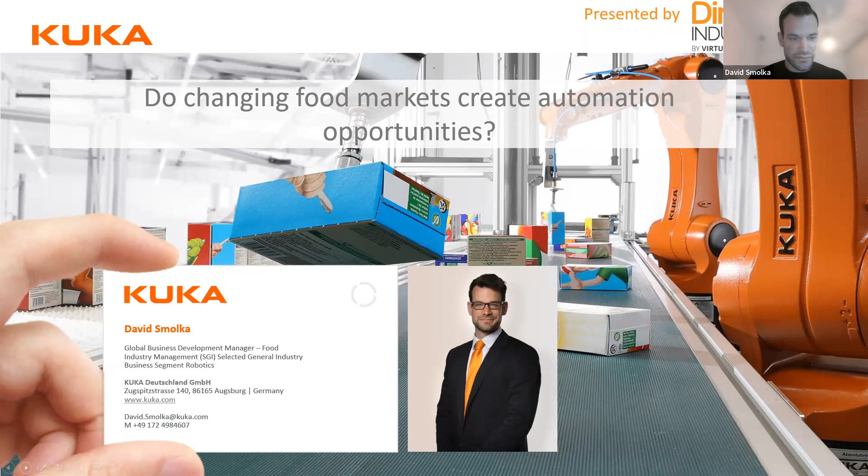Okay, let's go for it. I'll just use some markers to follow along with you. So the first trend we see in the world is customization. Customers, manufacturers, or supermarkets increasingly desire customized pallets, for instance, so their products get delivered more and more based on their needs. This is trend number one.

On the second one, we see changing demographics. Quite lately there was news that we have around 8 billion people living on this planet, so a growing population, but there's much more behind this truth, meaning that in certain countries people are growing more than in others, and we see people getting more elderly, especially in the area of Europe.

Then the third one, over here, we see that the topic of pandemic changed quite some things, but it must not always be a pandemic. It can also be regular disease and topics that are actually quite involved in the hygienic environment of food.

And then the last stage, I'd like to look a little more into the future. So present some stuff for future logistic solutions, meaning that automation can not only be placed in the factories, but also outside of them, for the trucks in the front or in the back—but more on this later.

To represent a little bit the world of a production site, we are starting always from the supply. So something is delivered over here in the very left corner, and the initial task that we have is depalletization. It does not apply maybe to every site, but it's an example to discuss a little bit the automation opportunities. This big robot will do the depalletization.

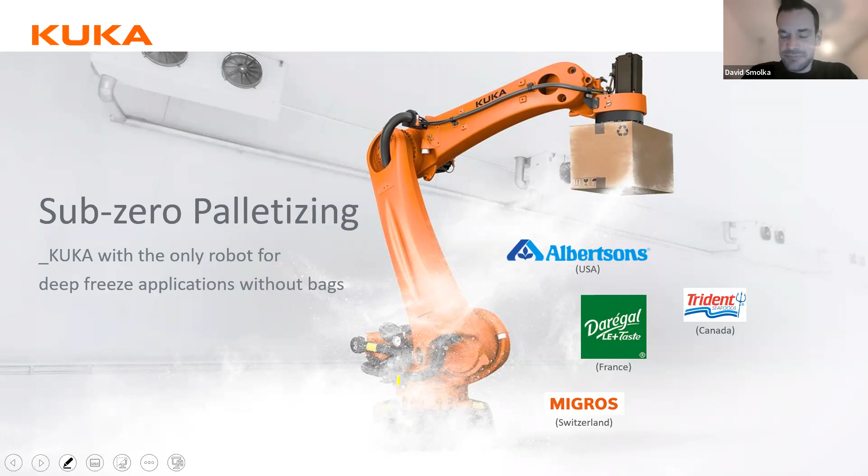And here comes one of our bridges, our first robot I would like to show you: the Sub-Zero Palletizer. Why I'm showing this robot now is related to bottlenecks, because we see more and more requests coming to our house about supply chain topics like bigger freezer areas, where companies are deciding to extend freezing areas or build new ones. Here we can talk about one of our robots called the Arctic Palletizer, meaning the robot can work in areas down to -30 degrees. So you don't need any protective covers or additional stuff. There are special programs running that make this robot operate in this cold environment.

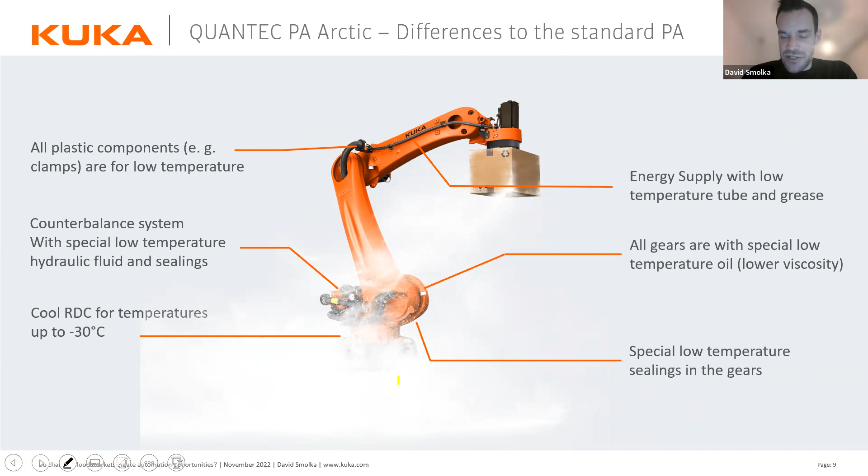Well, to follow up on this robot, I would like to show you a special video of how this one could look like in a factory. I think pictures are nice, but I would like to show today in this webinar some videos so you can understand even better how these operations look like.

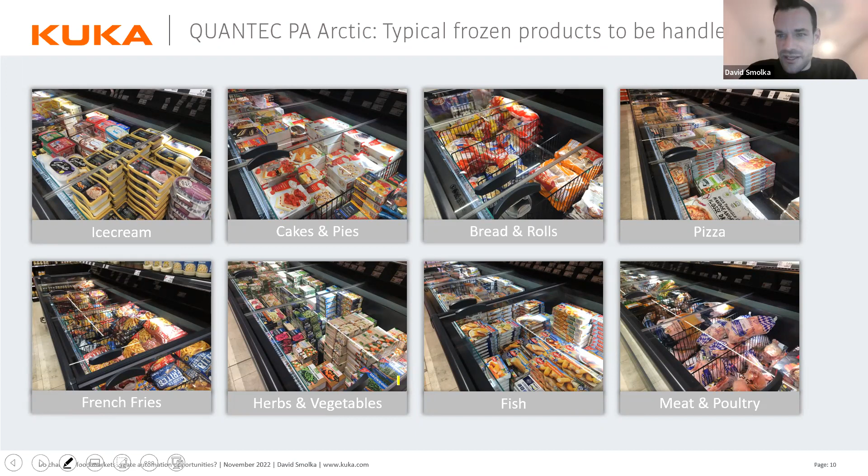To understand what we talk about, it's also necessary to see the variety of products. If we call it a deep freezing area, it can be variety from ice cream, it can be bread, it can be pizza. So basically everything that you can freeze, and this can be literally everything. I'm not a freezer expert, but I can imagine you can freeze a lot of products in the world and then handle them in different ways.

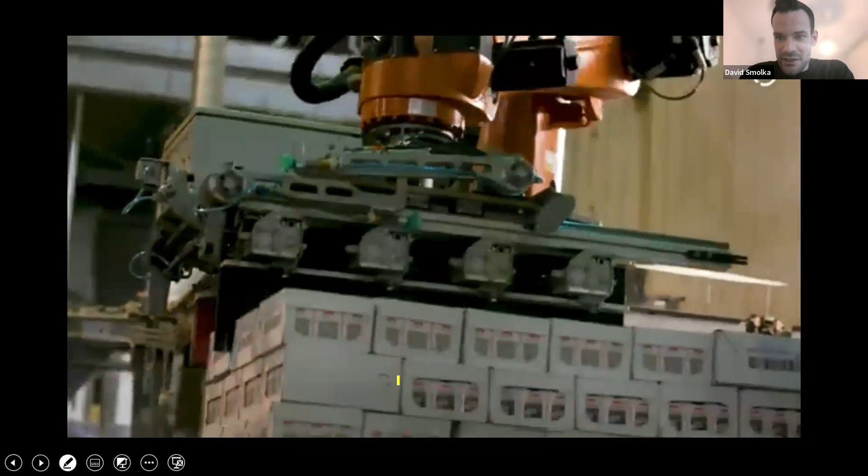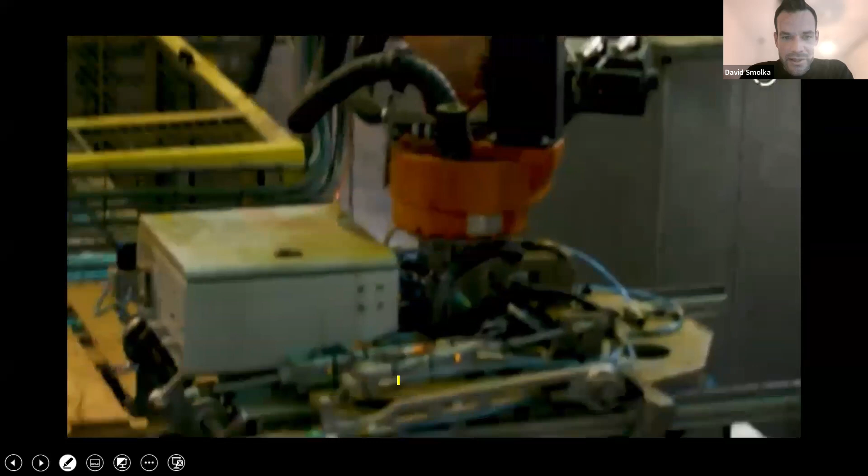So let's go for the first video, where you can see one of those freezing areas, where the robot is actually working in a really cool environment - cool meaning very cold in this section. This is a company that is basically operating with spices. They're delivering spices from France, and they have this robot installed in their factory because they need to operate in this really cold environment. As you can imagine, for the people working there, it's also a big problem to work in this kind of cold environment. So they decided to use one of those Arctic robots to make the operation smoother. As you can see, there's no heating needed and no additional cover on top of this robot.

I think I would only like to show shortly into the videos to give you an impression, because there are many of them, so let's just run broadly through them.

Back to our supermarkets. What we see here are shelves filled up with many different products, many different SKUs that need to be handled. This brings us back to the wish of customization, the need to have not just a pallet delivered with standard products, but different varieties.

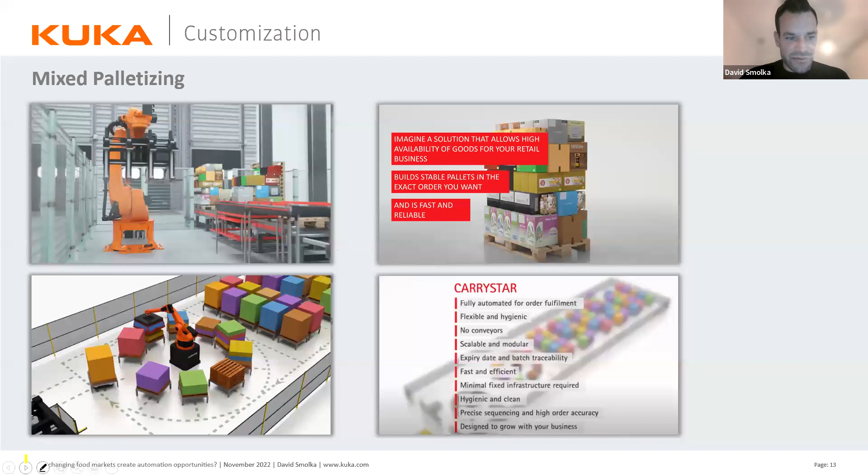So how can we solve this kind of problem? Coming to the next videos for mixed palletizing, I think this video is also showing a nice inspiration for how customization can look like.

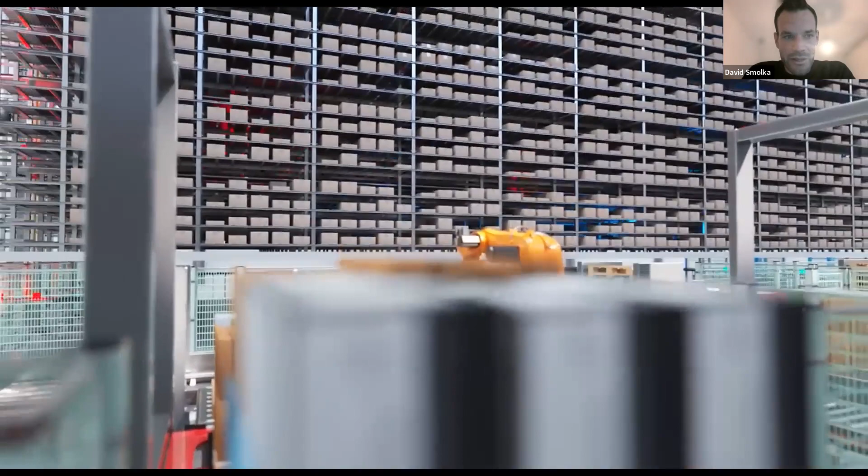Swisslog is one part of the KUKA group, and here we see a typical mixed pallet. What we see is really different products arranged on one pallet, so the customer can really define what exact products you want to have where. In the background we see one of the Swisslog warehouses, a big storage area filled with intelligence, combined with KUKA robotics at the end of the line to make the pallets ready.

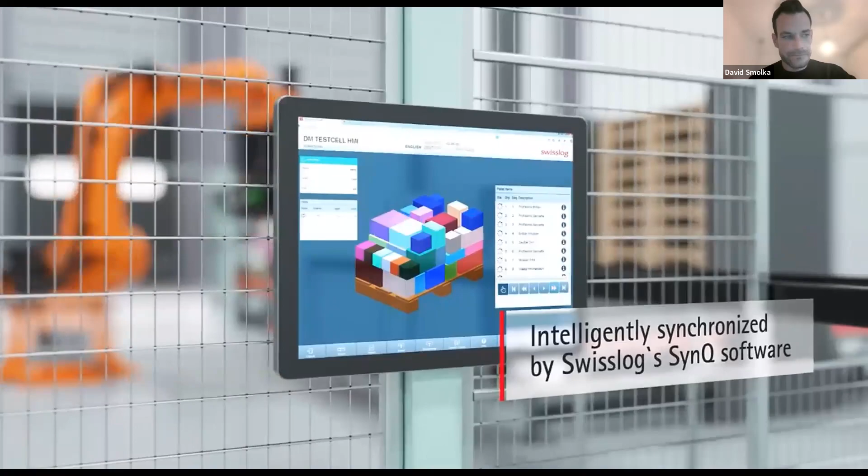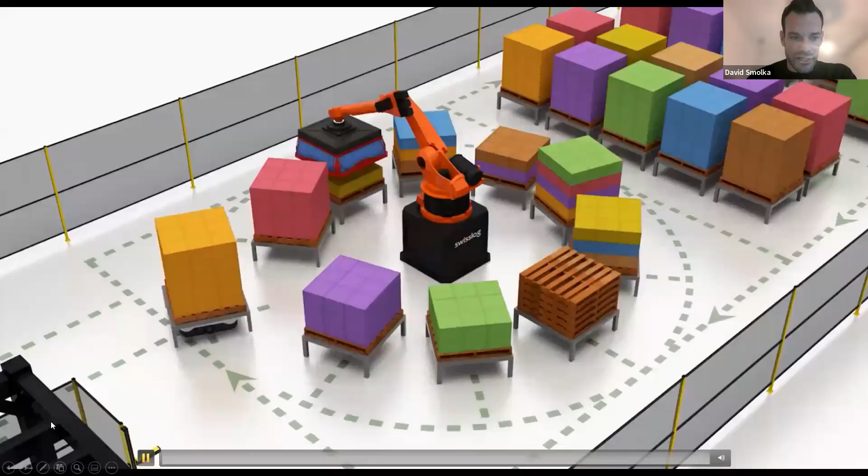This was the short video for this one. The second one talks a little bit about so-called rainbow palletizing. In this case we don't have each layer different, but we have a pallet existing of different layers, and on the layer itself is just one product. This is also a demonstration video to show how the technology works.

If you work with this technology, you can order one complete layer of one product. We see the robot working like in a carousel, and we call it rainbow palletizing because it's creating different layers with different colors, and it tends to look like a rainbow.

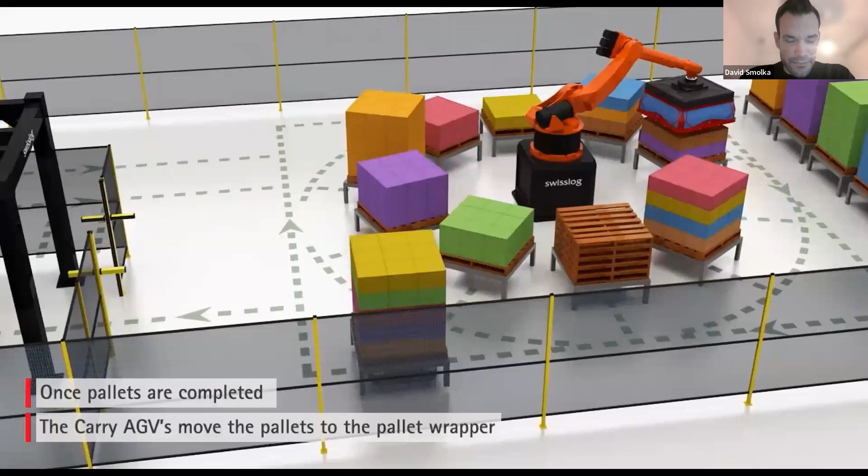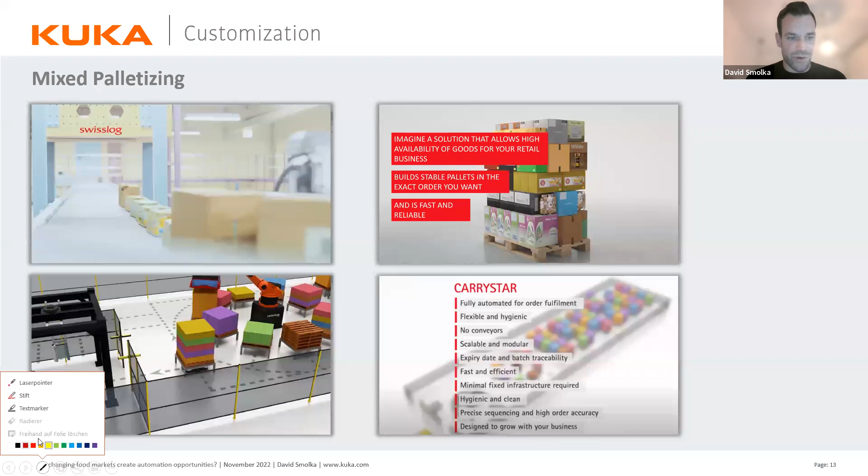What we see here is quite self-explanatory. Then the mobile platforms go to the area where we talk about not the unwrapping, but the wrapping in this case, to make the pallet ready to deliver.

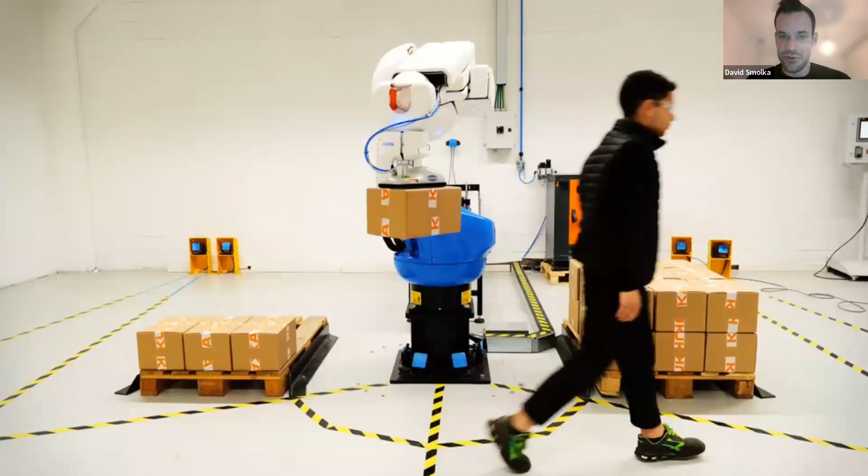While we're already at the palletizing area, I would also like to point out technology used to make those industrial proven robots more collaborative. We have today the opportunity with the AIRSKIN to equip different mechanics from our house to make them collaborative, meaning the skin is filled with air and reacts on different pressure. So if you touch it or have any contact with this mechanic, the robot will stop and make the operation safe.

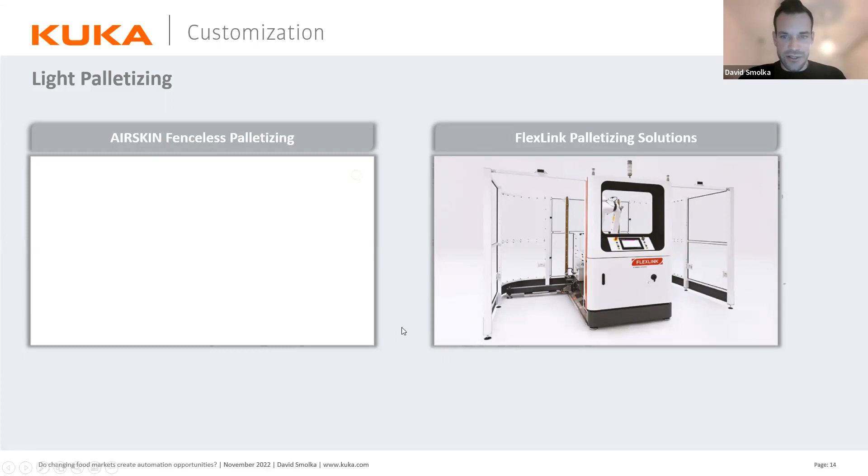In this case you don't need any fence around and can operate quite close to the robot, still having an industrial mechanic that is now collaborative. A second topic I'd like to touch on is palletizing solutions. This example is from FlexLink, and it shows how palletizing can be accessible almost for everybody.

At the front we see that the footprint is quite small, a limited area that this application needs, and it can be used very flexibly, meaning you can just switch it from one place to the other in production. Here we go, the lifting options, and then you can just change it.

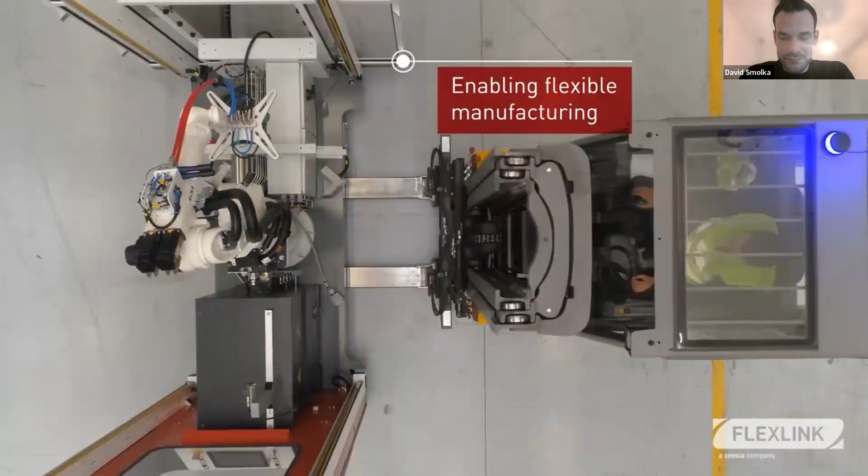So it's a question, David. We had a question from Christopher saying, "Hi, robots palletizing load max?" I guess, what's the maximum load that the robots can transport for the pallets?

Yes, it varies a lot. We have quite a huge portfolio on these palletizing robots, so there can really be a big differentiation of different loads. I think we can follow up on this one, you can write me afterwards and I'll try to give you a short session on our portfolio, especially on palletizers. But there's a really huge variety, it can be from 5 kilos up to 300 kilos, so really a broad range.

Thank you. So this palletizing solution, what is very unique or special here, what I like at least, is if you have seasonal production. If you have products you only need for one season, in summer, let's say some special barbecue products you won't need in the winter season, then you can just put this palletizing solution in a different place and take it back again later. That's the idea.

So about the air skin, just one more inspiration for how it works basically. As said, I think it looks a little better in the pictures. It's a typical industrial robot covered with this technology, and you can see once more how it looks in combination with the skin and the robot together in a fenceless application.

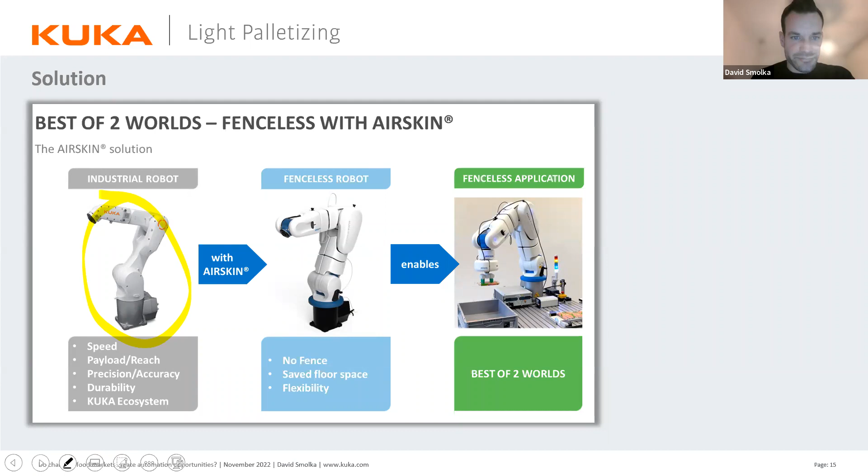Then we jump to the second trend called changing demographics. We feel a lot of requests coming in about lack of employees, people are missing, and I would like to show how this problem developed, touching more and more on this lack of employees topic.

So declining birth rates mean we see really decreasing numbers. If you look a bit more into the history, I have some statistics to show that these numbers are really going down in the birth rate, meaning that population is definitely growing, but not as fast or as much as in different times.

The second one is termination of employment, based on the pandemic. Quite a lot of people left their jobs. A good example is the airplane business, where people left and found other jobs, maybe in the home office or other opportunities they weren't looking for. Later, operations like airlines started running again, but they were missing employees. It's not a plug and play game to find people skilled for this environment or any job in the world.

So they put up signs saying 'come in, we are hiring.' They're waiting for people and searching for them, and it's quite a tough situation. Some airplane companies have real problems getting the planes filled with the bags and all this stuff.

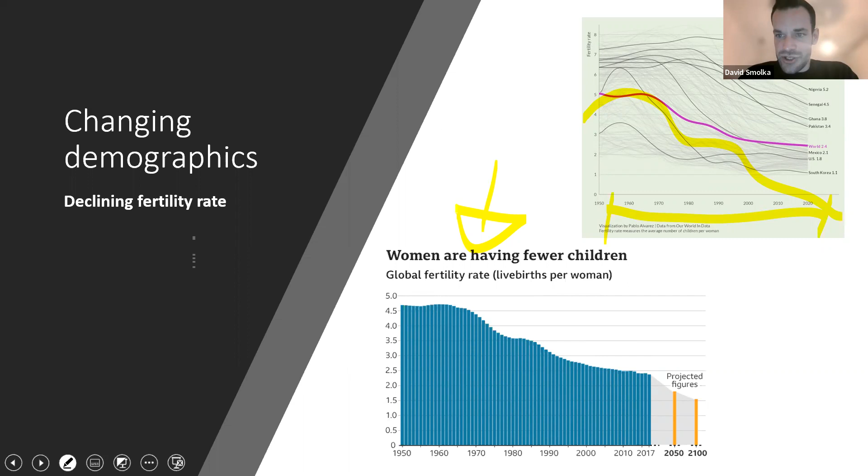The second graphic shows that women are having fewer children, so the fertility rate is also going down. It basically shows the same story as the previous slide: the numbers are dropping. Society and people are still growing, but not as much, and that means the whole society is getting older.

One example from one of my favorite industries - I operate a lot in the meat industry. Here a key topic is surely sustainability and animal welfare. The second one is working conditions - these tend to be quite cold areas, around 3 or 4 degrees, and the people are working quite heavily.

The third topic is contamination. If we look at the pandemic, that's one aspect, but we're also surely aware of African swine fever. If you want to travel from Germany or different places around the world, you'll see this kind of sign. It's still active and really a big topic for this industry.

The fourth point is higher prices - those aren't stopping for this industry either; they're also dealing with this. Energy costs are going up, and this industry has to fight with this topic in connection with sustainability and animal welfare. The expectation is to have these topics addressed clearly today, with more transparency about the preparation of the meat, the farms, and all this tracking.

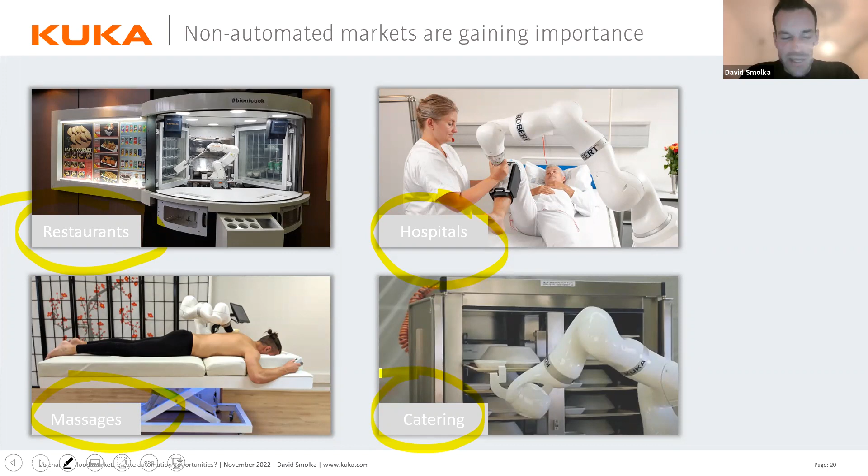Yeah, then setting the right structure to understand the industry. So how do we see the industry to be successful with you all together? We think that still we have to talk a lot to the system integrators. I mentioned that we saw the machine from Brazil delivering the food. I think it's very important to talk to this kind of companies called machine builders, called line builders, called integrators, to understand the business.

On the other hand, we are seeing that sensoric suppliers, especially in this industry, are very important. So people that are having camera systems that can help our robots to get eyes, make them more sensoric and perform tasks that are maybe more advanced than in other industries where you have more standardized tools or standardized products. Because if you look in the food industry, it's a very unique one since every food part is unique. So most of the time, at least.

And then we are talking about tool suppliers, which are also very, very important, not only for the gripping and the sucking, but also to make sure that these robots are hygienic. And the robot is hygienic when the gripper is hygienic to some extent. So this needs to be also very, very carefully.

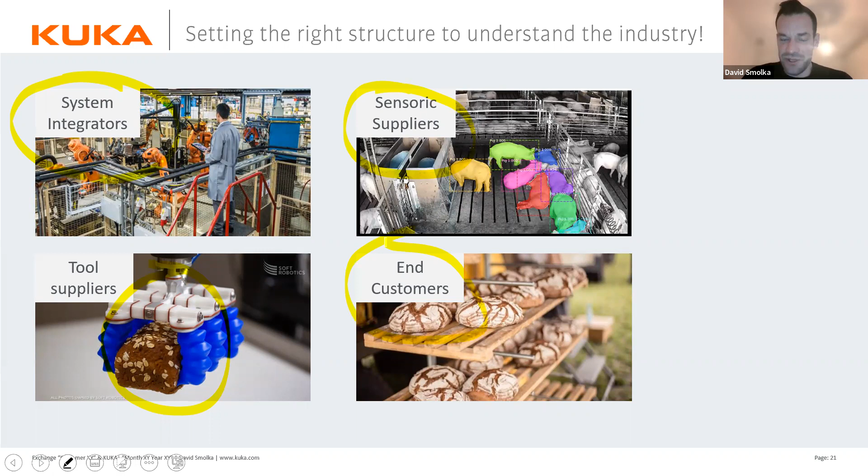Supported and understood. And the last one, of course, the end customer. So what do the people that are producing at the end these kind of goods, what do they need? What do they expect from robots? What vision do they have in their head? What kind of strategy? So this also needs to be understood very carefully. And I think if we combine all these parties together to a kind of consortium, we can be very successful to make automation more accessible for new markets.

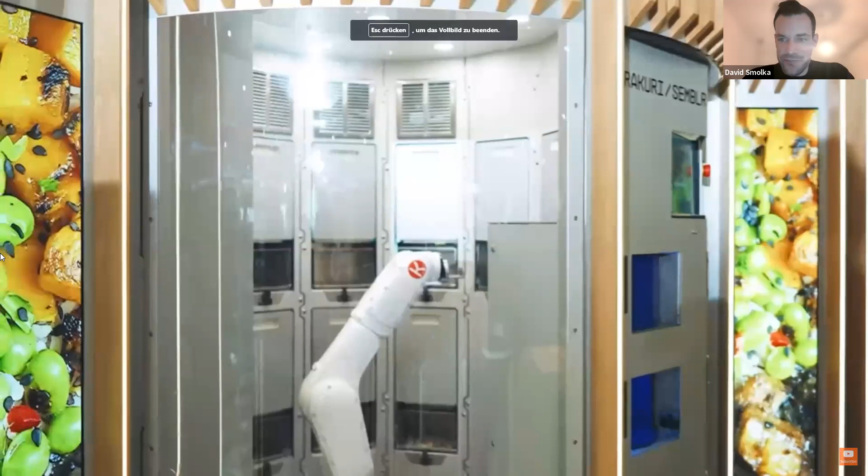Good. Some examples that I would like to show today is, for instance, the first one called the Makr Shakr. I will try to jump a little bit around. So let's start with some food preparation. It's from the United Kingdom, so from UK, and basically preparing food for canteens for people.

Yeah, so this one is a good example for a realistic application today that is serving the canteen.

Jumping to a little bit more entertainment factor. I think robots also have to be entertaining and make fun. So this is a good video to show this and shows a little bit the journey of consumer goods at KUKA.

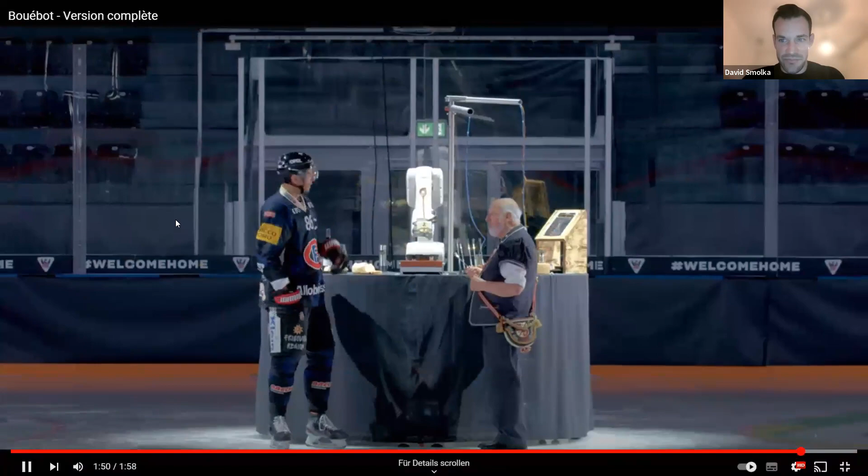Yeah, so quite an interesting story why I mentioned about KUKA, because as I mentioned before, we are learning a lot, talking to customers, talking to integrators, looking around the world. So this shows that robots are learning and then managing the tasks that are asked for.

Now, so here I would like to jump to the next slides. Let me see. Nope, over here. Okay. So to jump to the next trends.

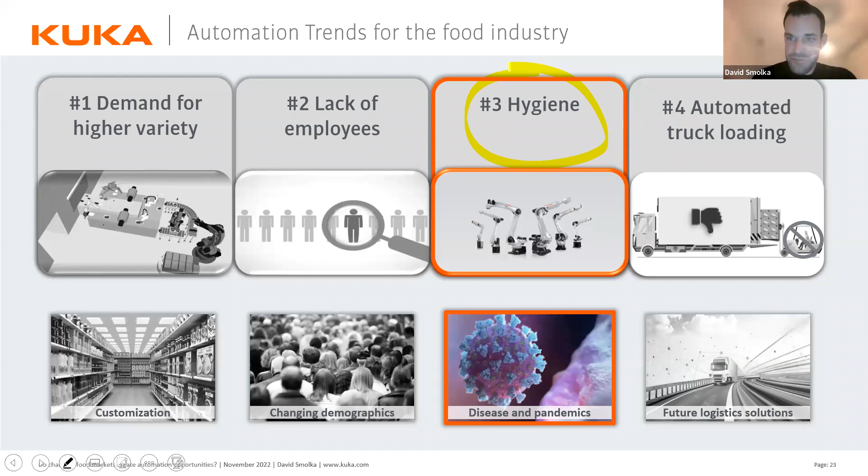Or the always important topic, hygiene, that comes from disease and pandemics. So hygiene, what's the problem over here, or the mission that needs to be solved? This is the expectation of consumers, of course, that go to a restaurant or that are sitting at home inviting some friends. They're expecting quite a good quality of food, very clean. Everything should be perfectly done.

On the other hand, we see the challenging environment. Yeah, so the production area is with a lot of oil. You have a lot of workers over here. You have a lot of conveyors. You have a lot of stuff that is typically not the perfect one for food. So this is the challenge in this case.

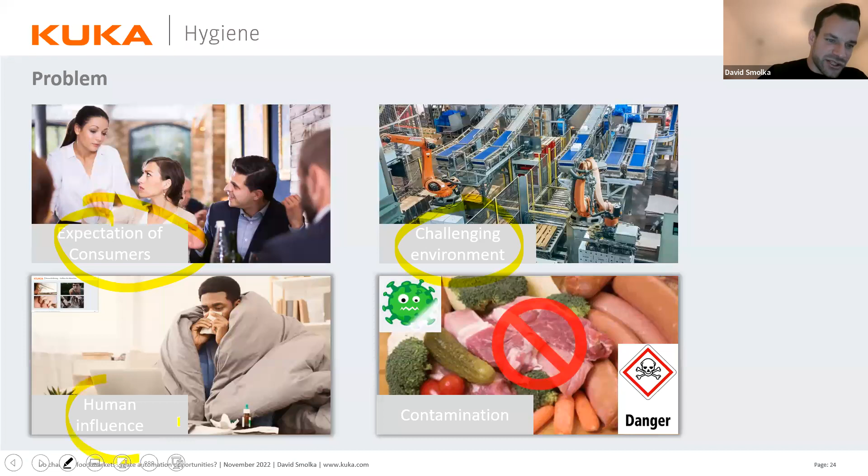Then the third one, we are talking about human influence. So of course, humans on the one hand, as we see on the picture, can get sick. It will happen a little bit earlier, mostly before we know. So this showed us the pandemic. On the other hand, we can also lose some parts in the production, meaning that you can maybe lose some hair, you can lose some plastic from your clothes or stuff like rings. So these things happened in the past already. So this brings the challenge also for the topic called contamination. So we need to make sure to be a very clear deliverer of robots to make this hygienic topic also clear.

What can happen if these kind of products get oil on it? We can have, of course, a business loss for the producer, but also for our side. We can have reputation losses, bad newspapers, and customers that are not convinced to buy this kind of products anymore in the future.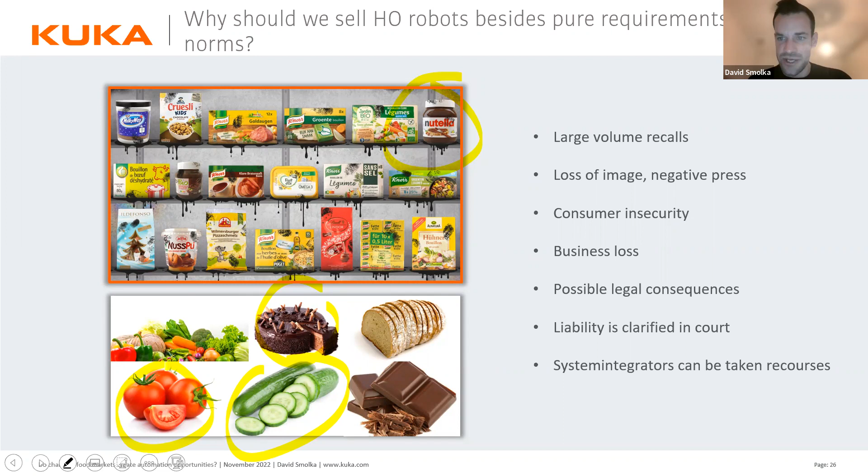So these are very drastic consequences, but those can happen, and products get out of the supermarkets, rejected, and all this stuff was happening already.

So we introduced a line called hygienic oil robots. We attacked this kind of oil topic. I will show you a little bit more what it means, but what's important to see is that we have our small series called the Agilus machine, ranging until our Quantec series, which is one of those more powerful machines.

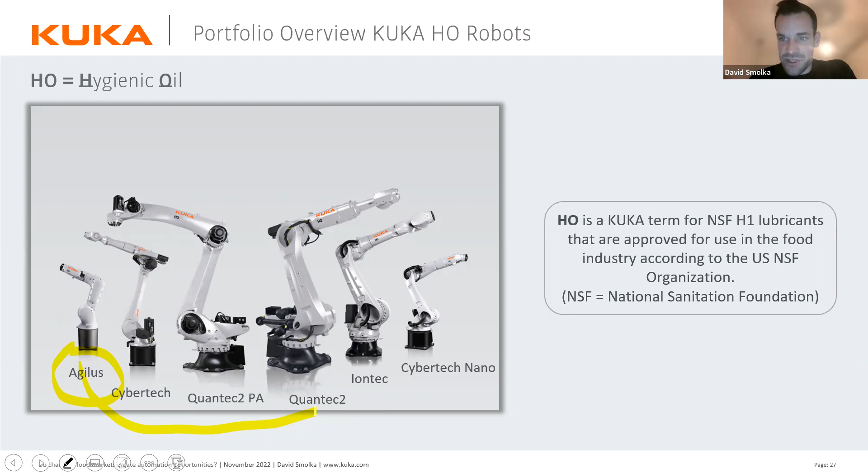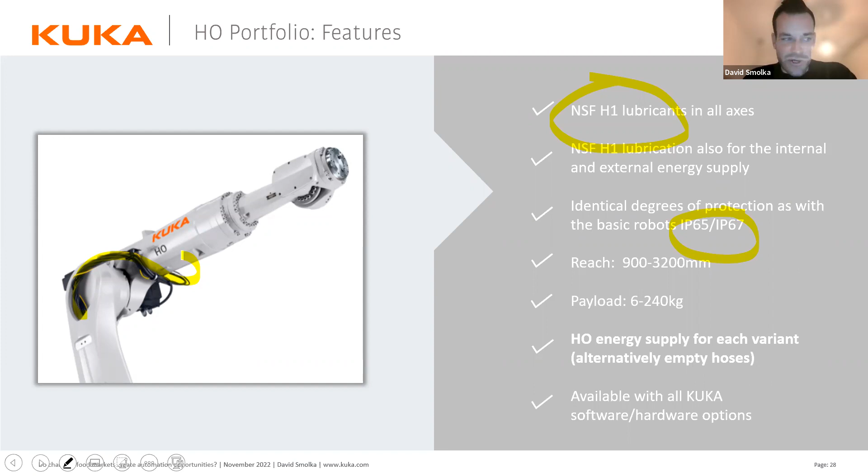If you look into some of those details, it means that we have NSF H1 lubricants, so food grade oil used over here. We have still a protection of IP65 or IP67, and we are also taking care of the external energy supply, which you can see over here, that this energy supply will also have hygienic oil used to make sure it's grippable for bread or for cake or all this stuff. So in case something goes wrong, not the whole chain is contaminated.

Then to touch the hygienic machine robots, which are even better equipped for this area, directly for the primary area, to use more open goods and use them directly. We are talking about this machine over here called the Agilus hygienic machine and our Delta picker. This fast picking machine is available for you guys in stainless steel and can do several jobs, as we learned at the beginning, from one conveyor to the other, to the trays and this kind of stuff.

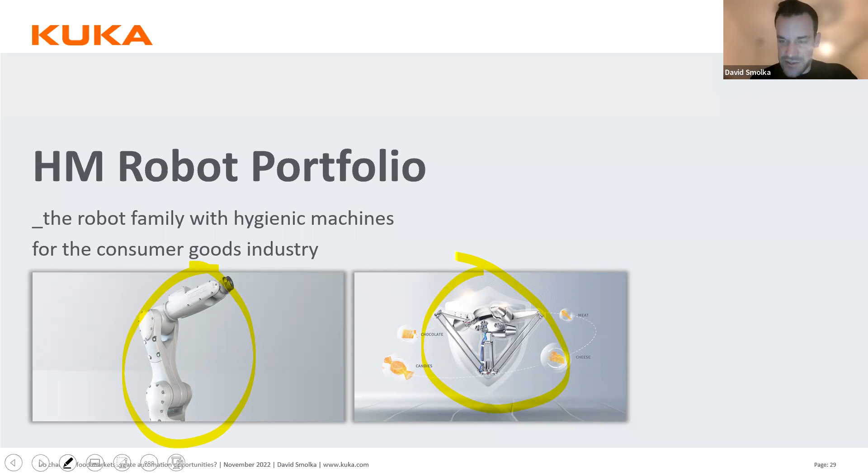So to explain the robot a little bit more, we are talking about the payload. We discussed before that we have different payloads, meaning the kilogram that the robot can pick. It's 3 kilogram over here. And we can also give you a little inspiration with a video to show what this robot is exactly doing and how it looks like.

So the robot spoon picking system. This has 6 minutes, so I will try to keep it rather short.

Today we are at module system located in Bukit Raja, Klang, Malaysia. Module system is actually our system integrator that collaborated with us close to 5 years ago, and they are the robotic system integrator for KUKA. Together with me today is Mr. Rajinder. Hi, I'm Rajinder Jitsing, I'm the regional head for module system.

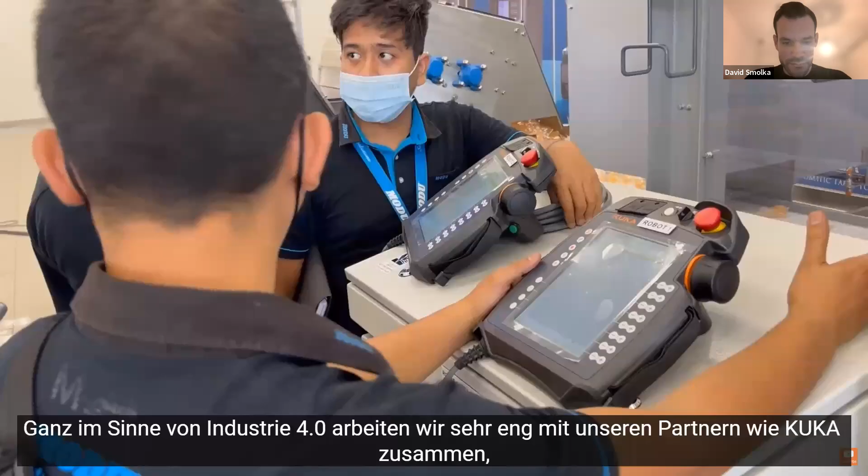Keeping in mind Industry 4.0, we work very closely with our partners such as KUKA to come up with more robotic solutions, a new current trend, with a range of Delta robots, articulated robots, and collaborative robots. Module and KUKA have developed a solution for our customer where we are picking and placing wrapped and unwrapped spoons into the conveyor pocket, which consists of food pouch.

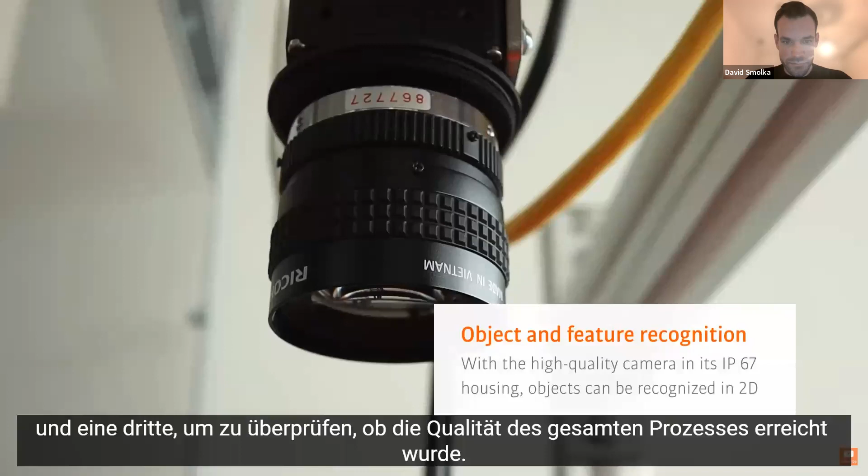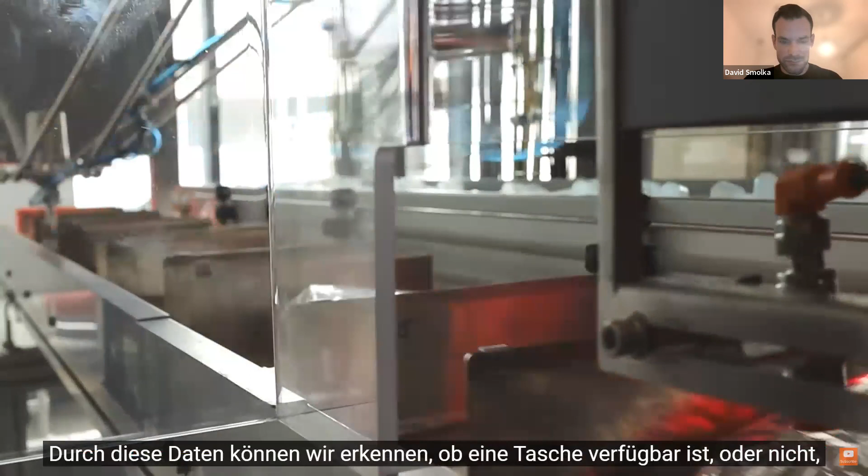How the system works is that we have a pick vision, a place vision, and also a vision to check the quality of the whole process being done. The pick vision will see the orientation of the spoons and send a signal to the robot, which will know the spoon is coming and pick it. There's another vision called the place vision, mainly focused on the conveyor pocket, where we will know the availability of the pouches, and where the spoons will be placed in that particular pocket.

Yeah, so I think this shows quite good what these robots are doing.

Famous for big speed, and in this case completely stainless steel, so very used for the food markets.

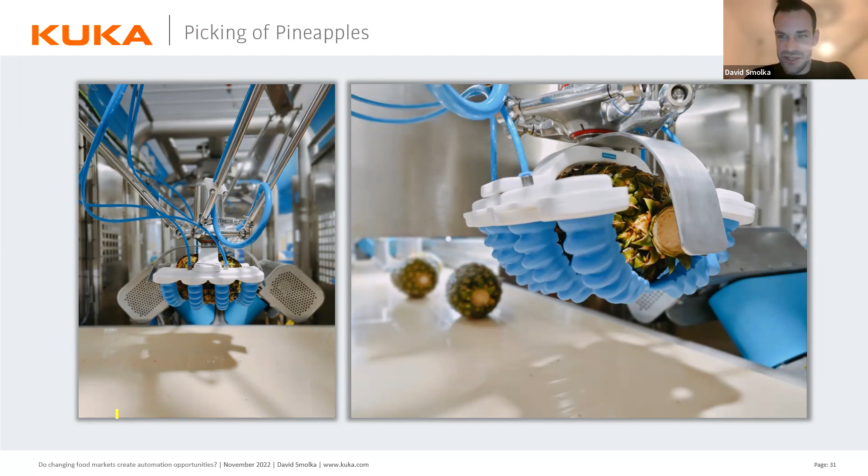To show another example, here we have a pineapple that is picked also from place A to B to a machine, and this can be more rough because the pineapple will have some fluid stuff coming out, and it can be quite dirty in this environment. It looks very clean on those pictures, but it can also look different. So this is also a good example to show the environments.

Then we come to a software topic. We heard it before in the video that these robots are working with cameras, and those are actually supplied by the software KUKA.PickControl. What we can do with this one is have one camera that is actually steering 10 robots, or up to 10, meaning you have one place in the whole line where you get the picture and then distribute the tasks to 10 robots. As we can see over here, there are 3 of them, but it can be even more. And the camera will make sure the robots get eyes and can see the task quite clearly.

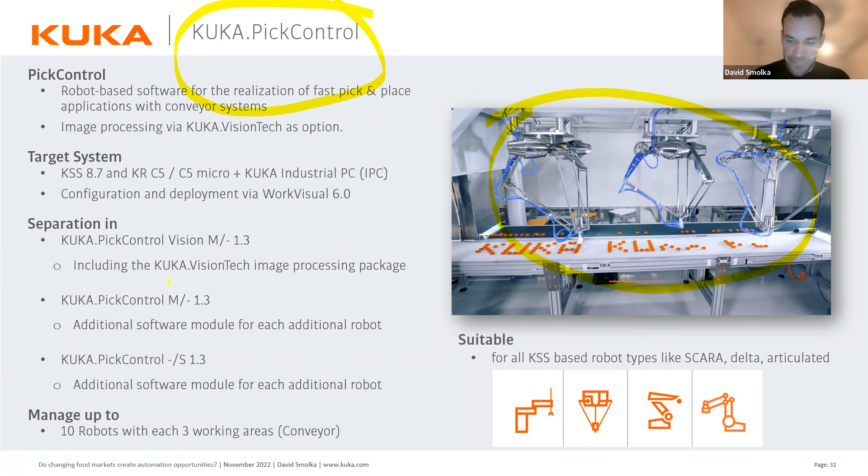Good. Then to talk about the hygienic machine, what does it mean in detail? We see that we have some stainless steel parts included here. We have IP67, and actually the design is also more hygienic, meaning that if you clean it, the stuff will not stay in the screws or in some parts, but it has rounded parts which will actually make the stuff flow out. And this is the way we are talking about the hygienic design.

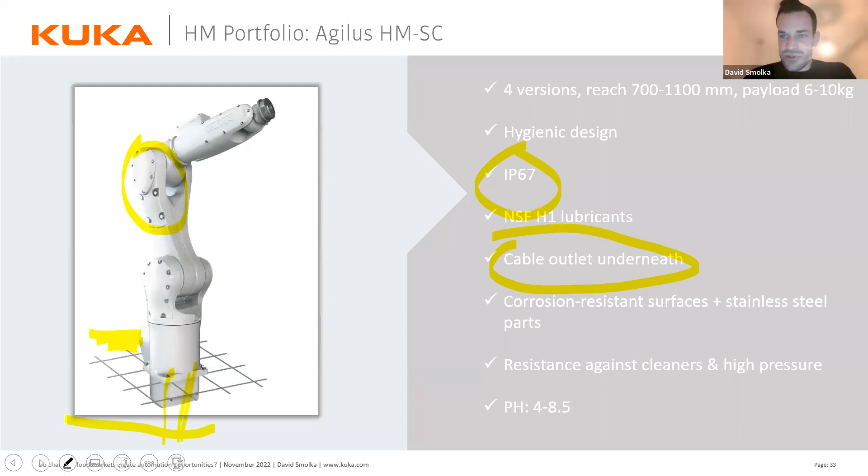And the cable outlet is underneath. So normally we have the cables going out here, but in this case they are going underneath, to make sure they are not in the dirty environment and go below the robot outside. We can see this a little bit more clear on this picture. On the right-hand side, there's the robot on the podest standing and mounted into its position where it works. And then the cable is really protected over here, going down and leading out of the dirty area.

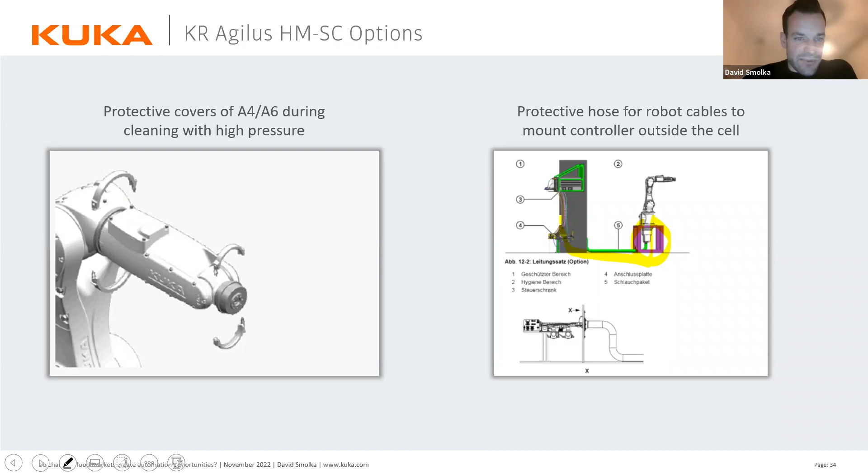For the cleaning, we are also having special protective covers for axis 4 and axis 6, which you can put on the machines before you clean in case you have very aggressive cleaners. Those are helping to make the robot survive even longer.

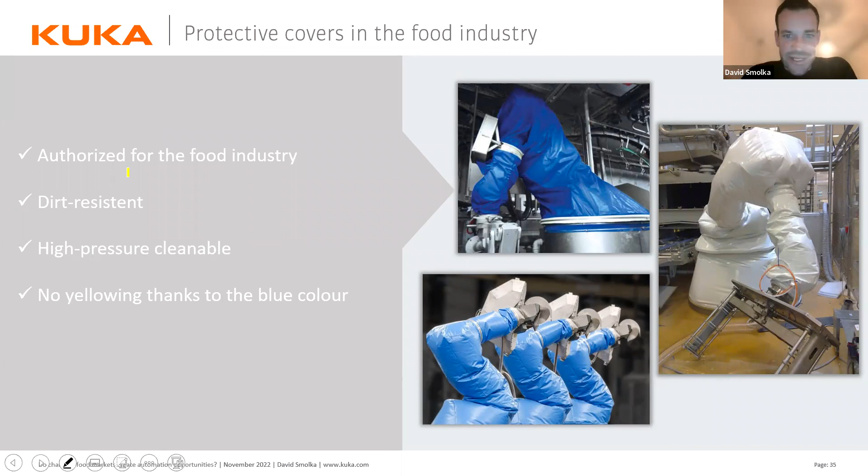And in the case that you have very, very special environments that are very tough, we are also talking a lot to protective cover suppliers. So those guys are engineering this kind of coats, or how we call them, the covers, to make the robot survive in the toughest environment. In this case, you can just take a very standardized industrial robot and put it under the cover, because it will really protect the robot against any hard cleaners.

Good. Now we talk a little bit about customer service in this area. I think it's also very important because this area has to be maintained in a special way. So I just want to give a little bit of some services that we are offering from our side to make you more familiar with robots and also support you at initial projects, which can be quite challenging in the food business.

Of course, we have some feasibility and system selection, so testing at KUKA if we can do this application, if it's feasible, if it's too hard, or if it's actually possible to do it. And for this kind of topics, we have even an application center established in Barcelona, where you can contact us for special applications, and we are ready to test them, especially for the Europe region.

Then we are looking into simulations, trying to show you on the screen, like today, what is possible, what is not possible. We teach you with our KUKA College to show you even how programming works, and also talk about used robots, which are very interesting today. When we talk about longer delivery times or any supply chain topics, then used robots are a very interesting topic to be used.

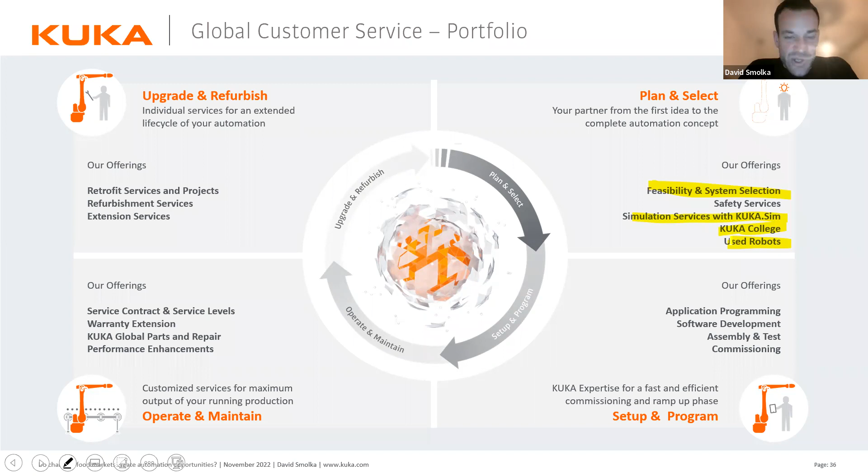Good. Then the second one, talking a little bit about spare parts. So showing you that we are actually available around the whole world. We are not only in Germany, where we are headquartered, but we are also operating in different parts of the world, and even having in Asia our whole supply chain center for the parts, and also in the USA. So this kind of stuff can be delivered right to you in quite short lead times.

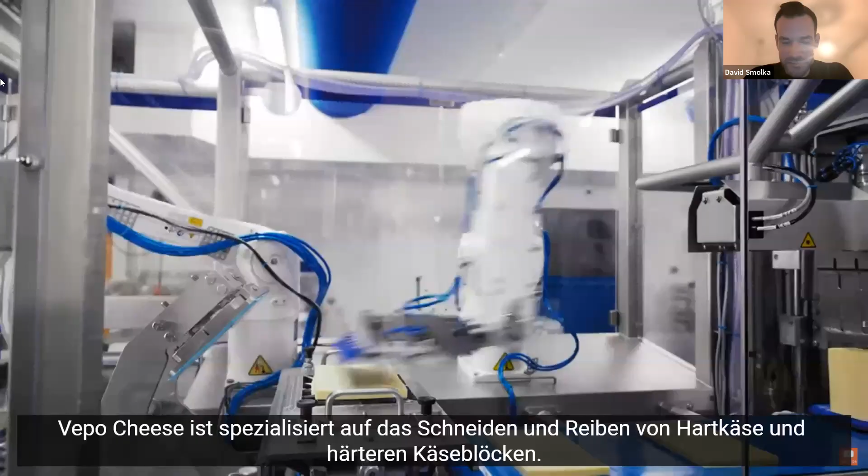Then to show some more examples about the primary area, we were talking a lot about cleaning, a lot about dirty environments. I would like to show something from the cheese industry. That's quite a new video that I like a lot. As you might know, cheese is quite famous in Netherlands, so this looks like some Dutch area, specialized in slicing cheese and grinding cheese from hard cheese and harder cheese blocks.

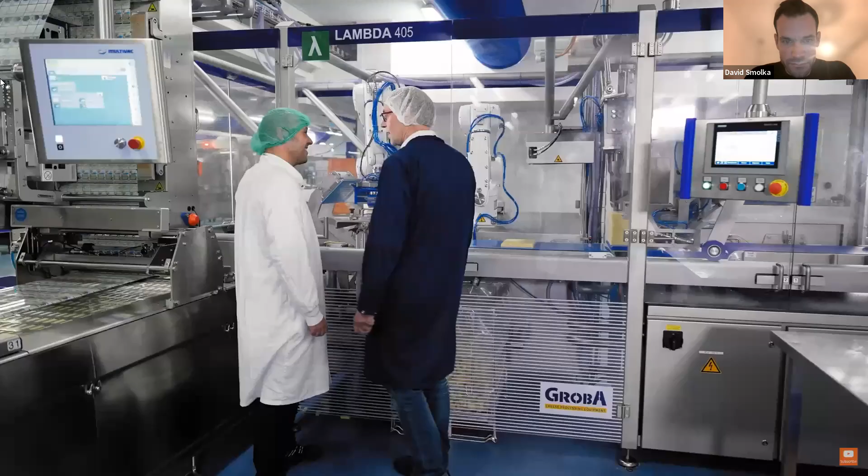My name is Hugo Verput, Technical Operation Manager at Vepo Cheese, responsible for technical service for 2 production locations, inclusive a warehouse, inclusive buildings, and also responsible for my proposal for invest for new lines for automation and replace when they reach the technical age.

The idea for the automation solution comes from discussion internally about the old line. The old line needs a lot of people to run it. The quality standards are not high enough, also the output could be better. Then we have the question: can we build a line with less FTE, high quality and double the output?

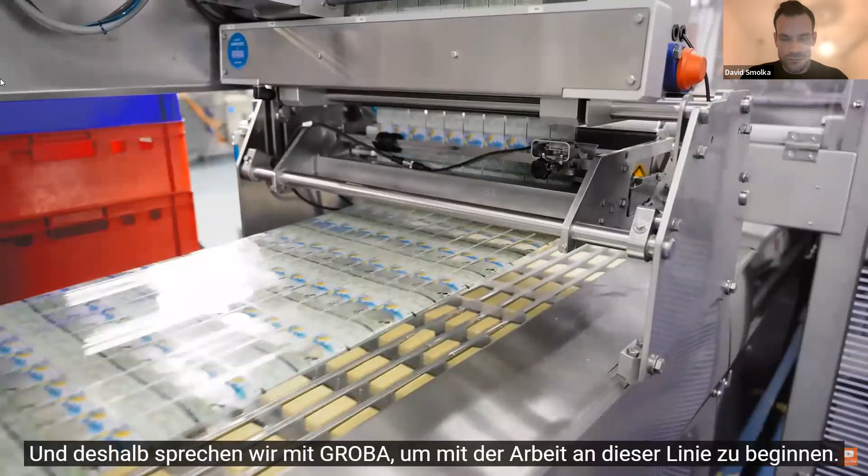And that's why we're talking with Groba to start working on this line. My name is Robin de Groot. I work at Groba, I'm one of the managing directors there. My responsibility is mainly focused on the sales and marketing.

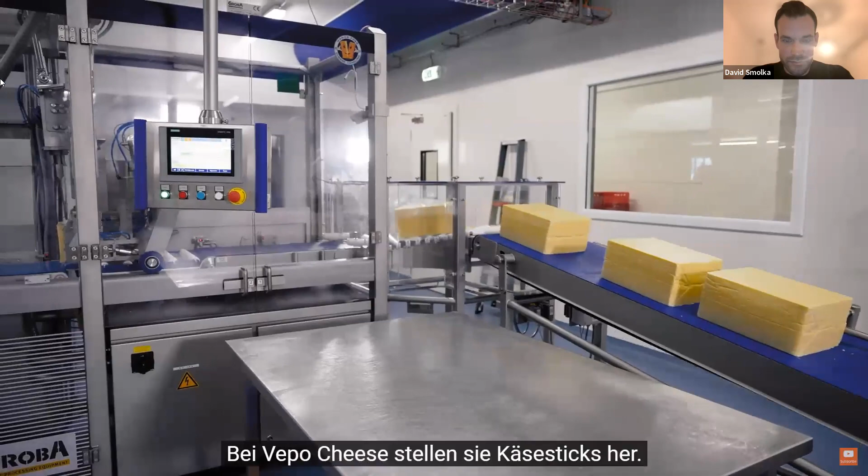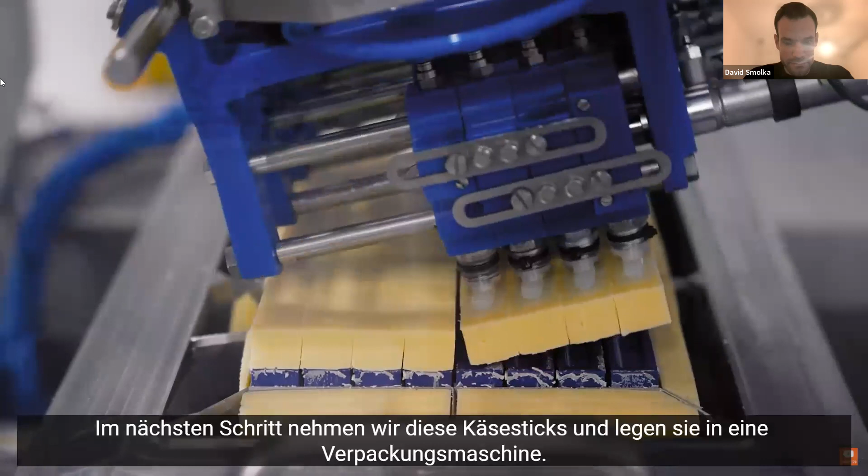Well, at Vepo Cheese, they make cheese sticks. We provide equipment for cutting this, and this starts with cutting a whole cheese into slices. This can be Euro block, Gouda, Edam, or cheddar blocks, which are cut in slices. In the next step, we put the slices on a cutting unit, and then we take these cheese sticks and put them into a packaging machine.

Yeah, so I think these are the most interesting parts to give you some inspiration on this one.

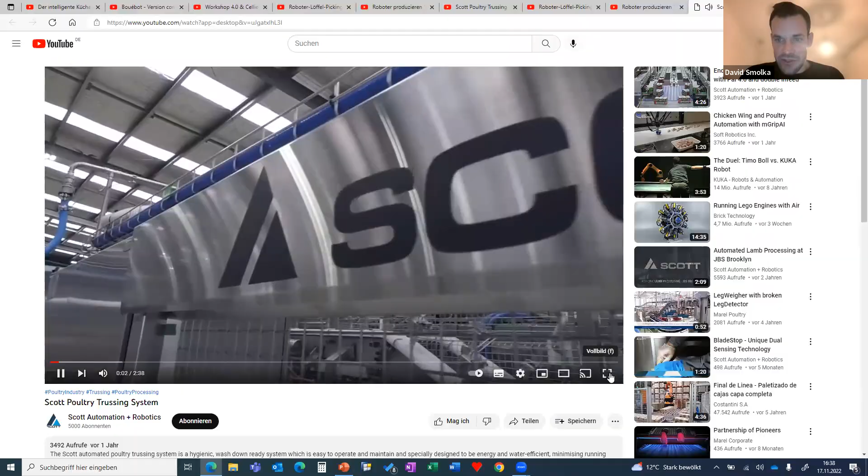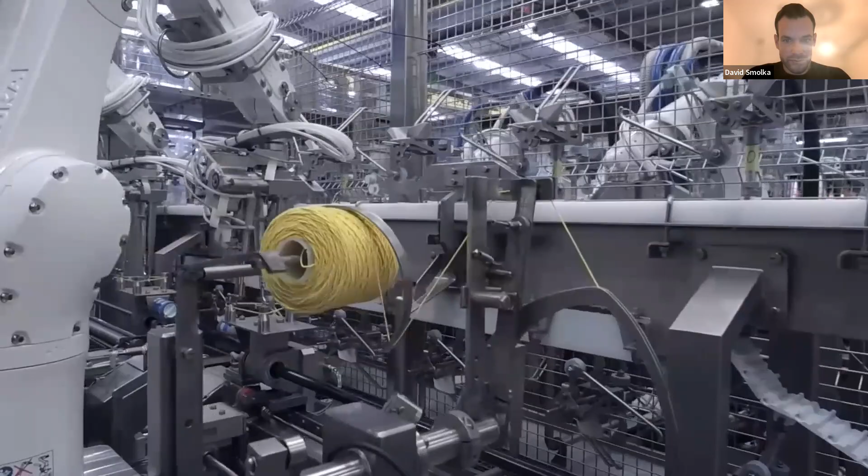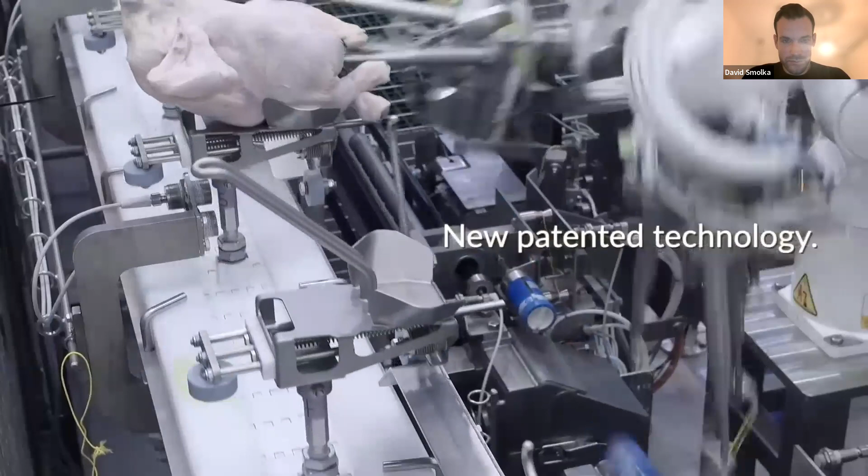I would also like to show the example of chicken trussing from Australia and New Zealand for Scott Automation, a very interesting example over here, with many robots working together to make the chicken ready for the supermarkets.

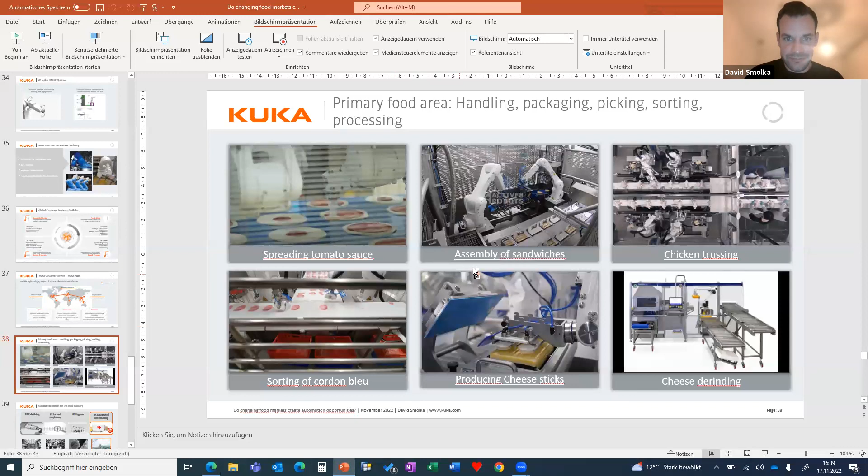And then the last one would be the assembly of sandwiches. So if we look over here, let me see... yeah, then I will use the link in the PowerPoint. This is a good example for the catering industry, or food services, where the robots are actually used for packaging those sandwiches into the packaging area.

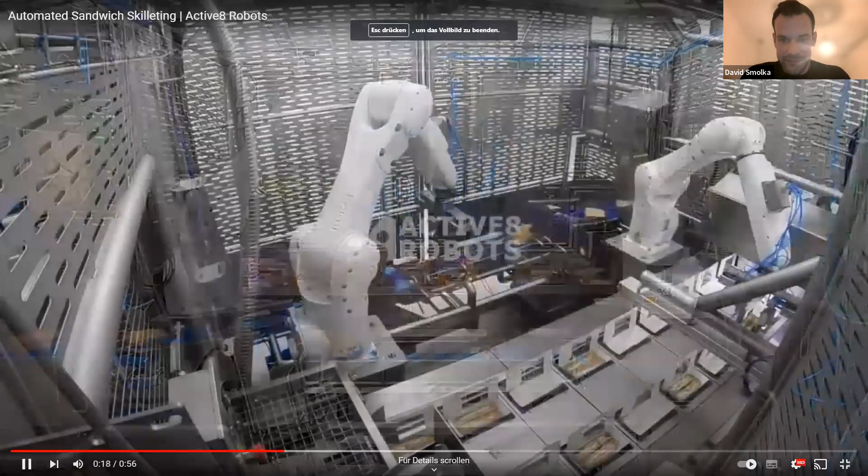Okay, and then we have some more examples that I just have here today on the slides, but I won't show them. It's the case of spreading tomato sauce on pizza, it's also the case of cheese derinding, so putting away the cheese with the robot, and sorting of cordon bleu, so picking them from one conveyor to the other in a hygienic way.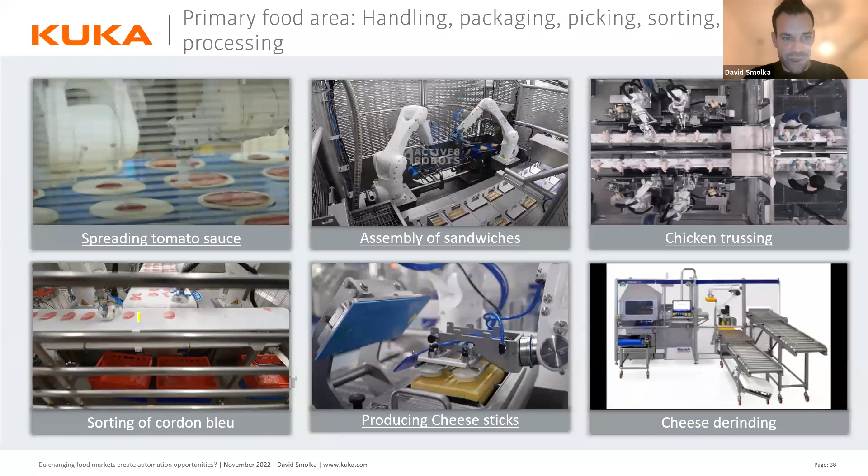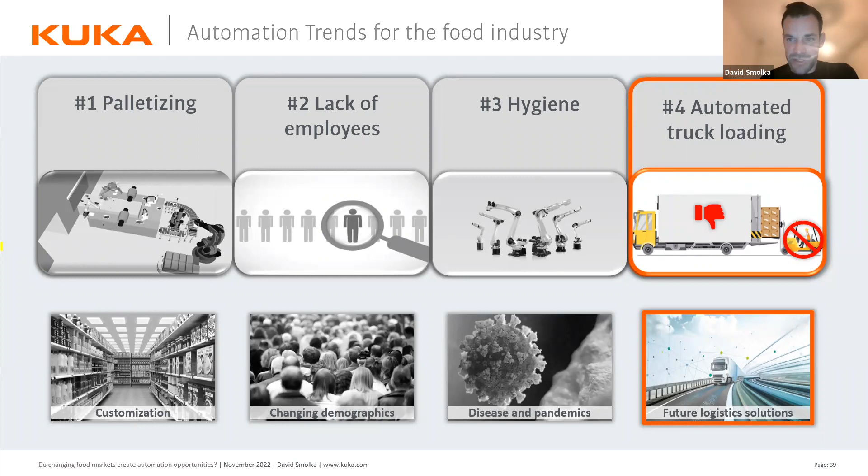Good. Then to close up this webinar, to give a sneak preview also on the future, we are looking into automated truck loading. I will just jump on it very briefly to show a little bit where the future is going. Here we are talking about the production area that I showed basically today during the whole webinar, showing the storage, showing the logistic tasks, and now in the future we are also looking more into these segments over here.

So I think this task is quite a hard one, to load trucks and to unload them. We see that some companies are already quite active, and that smaller, medium, and even bigger companies are requesting this kind of solutions for trucks, for containers, for logistics stuff. So I think this can be an interesting future for us all.

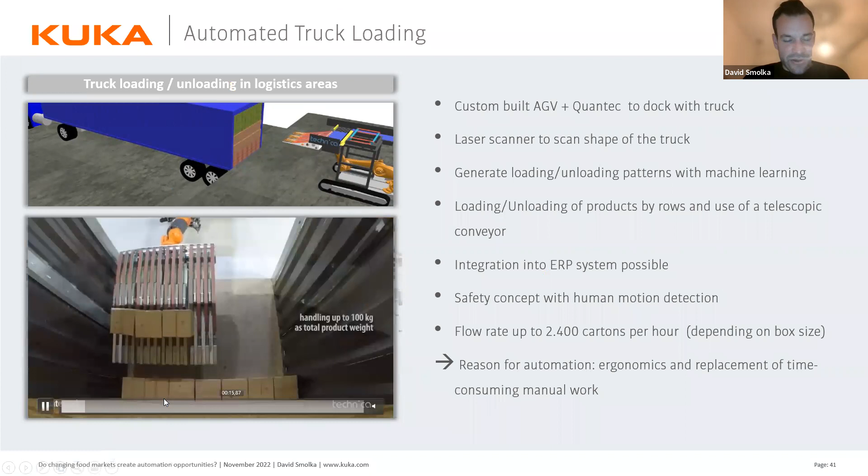Looking into this one, I have here a short example from the company Technica. They did already some drafts and have even a short video that I will share today to show how truck loading can basically look like, or deloading. In this case, we see a robot equipped with some grippers that are sucking, and then operating in front of the container.

So as we said, it's not something that is rolled out already completely. We've seen some nice ideas in the world already. I think this will be the future, that's why I put it today in the section of trends that will be future automated now.

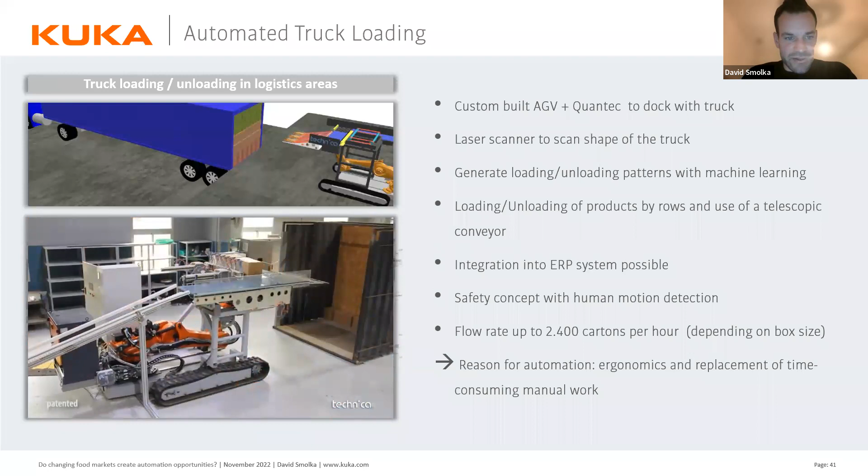Okay, yeah, then what's next? I think to finish up this webinar, it's also nice to give some ideas what the future could look like. And I think the areas that are outside of production, like the supermarkets that I emphasized today a little bit, are going more and more to be automated, to be digital, like the digital shelves or the inventory management, so these kind of data are more and more collected.

And of course, you will see some automation and robots behind that are actually handling the products and giving data from one system to the other, meaning that the consumer can in the future see with virtual glasses even what kind of product is that, where was it produced, what is the amount of protein, when is the date when it will be not good to consume anymore, and all this stuff. And he can probably even customize it depending on his needs, saying I'm searching for something that has not included milk, and this virtual glasses will help us to find this product.

We see already some prototypes or some interesting research about it, but I think we can also talk about stuff like loading shelves automated in the night with some mobile platforms and robots. But this is more the future and more dreaming about what could be and not what is today.

So to close the session, changing markets do create automation opportunities, definitely. We see that the lack of employees is bringing up new applications that were not interesting before, because manufacturers are really searching for automation. We see that hygienic topics are still a great challenge, and also this one will be a big topic, and that customization is increasing even more for producers, for suppliers, and also for us consumers.